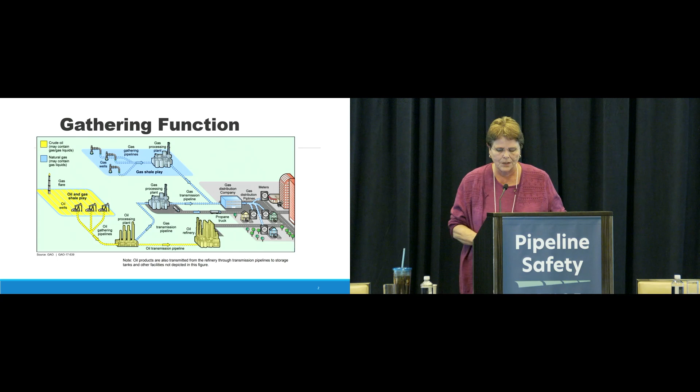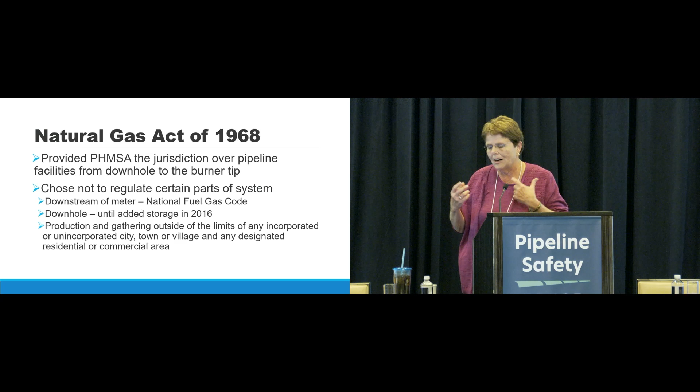So the Natural Gas Act of 1968 provided PHMSA with jurisdiction over pipeline facilities from downhole to the burner tip. PHMSA chose not to regulate certain portions of them. They chose not to regulate downstream of the meter - that was covered adequately by the National Fuel Gas Code. They chose not to regulate downhole until 2016, when they added storage fields and storage wells to their jurisdiction. And they chose not to regulate production outside the limits of any incorporated or unincorporated city, town, or village. So they really didn't even regulate gathering lines for a number of years.

So in 1992, Congress gave PHMSA the authority to regulate gas gathering, to define gas gathering, and to develop regulations for these regulated gas gathering lines. PHMSA worked on this for a number of years. API RP 80 was published in 2000 - this was the industry standard on where to determine the start of gathering, the end of production, and how to determine gathering lines.

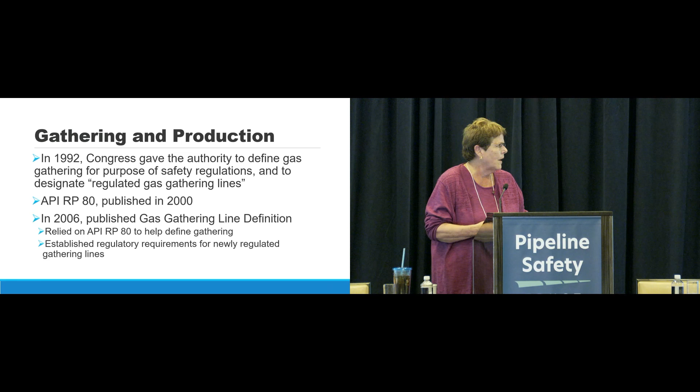So in 2006, PHMSA published the gas gathering line definition. It became regulations, relying on API RP 80 to define gas gathering and establish some regulatory requirements for the newly regulated gathering lines. One of the things was to establish the start and endpoints of gas gathering as defined in 192.8, as defined in code and in the standard.

It incorporated API RP 80 as an incorporated-by-reference standard, and it established regulated gathering by class location - so Class 2, 3, and 4 became regulated. Class 1, which was less than 10 buildings per mile, remained unregulated. So what PHMSA is doing is looking for those areas where there was a bigger impact on public safety to make those lines regulated. They also established the types of lines based on the materials and pressures those lines operated at.

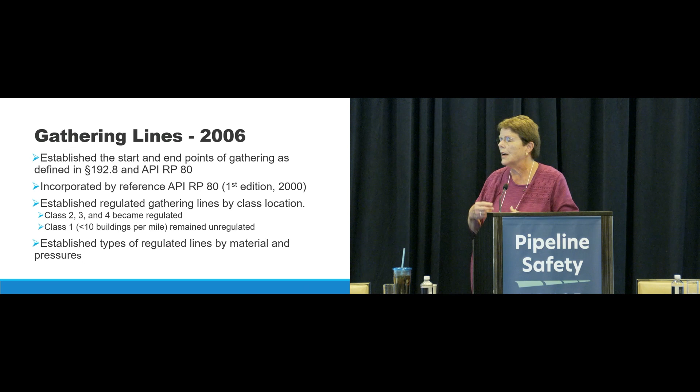So this is a very simplified picture of production and gathering. You can see production listed in those light black lines - those are the wells, the circles. Unfortunately there's no symbol in Word or PowerPoint to designate a well symbol, so I just used a circle. So the circles are wells, the black lines are flow or production lines, and the red is the gathering line. Now one of the problems is terminology.

What do you call it? What do you call production? What do you call flow lines? Industry calls it, folks, operators call it different things. So in the simple world, gathering starts where you have a commingling of two well lines. Up until that, it's production. Then it becomes gathering.

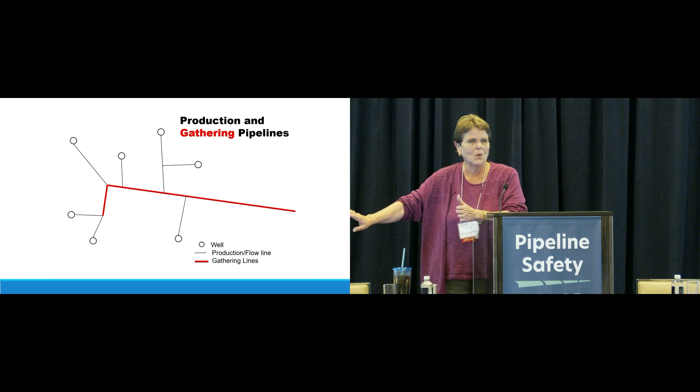Some states have defined gathering starting where it goes through the meter. The state of New York defines it as within 50 feet of the wellhead. Most states rely on API RP 80. I even have a problem within West Virginia where my oil and gas folks who monitor the wells call everything from the well to the meter gathering, and everything downstream of the meter production, which is the exact opposite of what I call it. So there really is no standard for what's called gathering and production.

Some unique characteristics of gathering lines is they have their highest pressure at the beginning of their life. They're attached to the wells, and when wells are first drilled, they're at their highest pressure. As the pressure declines from the well, the pressure in the pipelines declines. So as the lines age, the pressure reduces, and it's not as big an issue as transmission lines that carry the same pressure year-round.

Some of the other issues with gathering lines is most of them were constructed without any regulatory oversight. There are still wells in West Virginia over 100 years old that are economically viable and still producing. So that means that pipeline is 100 years old. I have seen pipelines built out of well casing. I have 5-inch lines, I have 1-inch lines, lines with dresser couplings, lines that are screwed together. They used whatever they could, okay?

I put this picture up here because they're built without regulatory oversight. That black line is actually a production line suspended in the air, okay? Yeah, those pictures that show them in the air, a lot of them come from West Virginia.

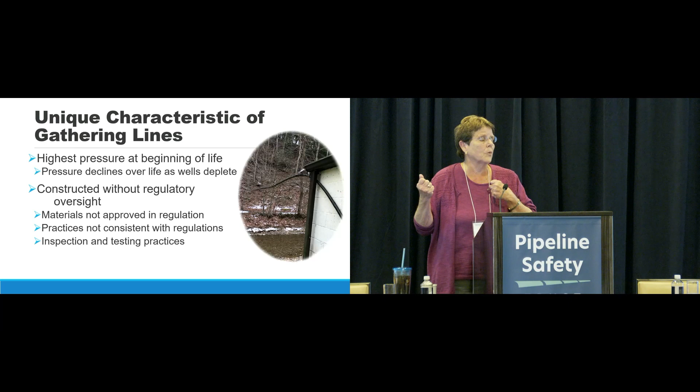So in 2006, they defined two types of gathering lines. There was type A, which are metallic lines operating at a hoop stress greater than or equal to 20% SMYS, or non-metallic lines, mostly plastic or composite materials, operated at MAOP greater than 125 pounds. These are located in class 2, 3, or 4 locations, and they were required to have full transmission regulatory requirements - they had to follow the same rules that transmission lines did.

Type B lines are metallic with an MAOP producing a hoop stress of less than 20% SMYS, or non-metallic lines operating below 125 pounds, in class 3 and 4 locations, or class 2 locations by one of 3 methods that PHMSA allowed operators to use. They had limited regulatory requirements. Now this kind of makes sense because there's lower pressure lines, and remember I said that as they age, the pressure goes down, so the requirements weren't quite as stringent.

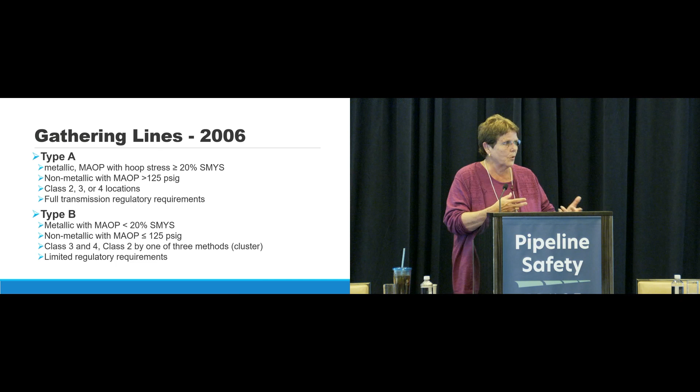But the problem was when the rule came out in 2006, conventional wells were the ones being drilled. There was no anticipation of the growth of the technology of horizontal wells. The shale plays such as Marcellus, Bakken, and Barnett were just starting to appear. So the regulations were not written for these new high pressure, large diameter gathering lines.

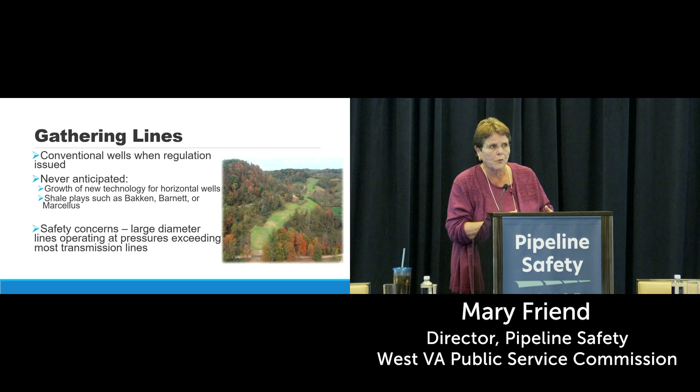These new gathering lines are operating at pressures that exceed most of the transmission lines. Typically these are built to about 1,440 pounds, while most transmission lines are operating at about 1,000. So the issue becomes, shouldn't those people living next to those gathering lines in those bottoms have the same safety aspects as somebody living next to a transmission line at lower pressure? And the gathering lines may not have been built to regulatory standards, so it becomes an issue.

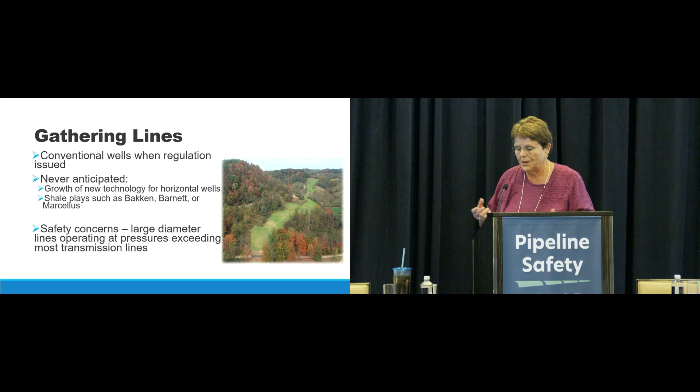Some of our challenges include the industry initiatives, API RP80, which tries to strip out a lot of the gathering. There's a term called incidental gathering, which was kind of an oversight by PHMSA in developing the rule. This allows lines coming out of a processing plant and taking that production gas to a transmission line - they didn't pull those into the regulations, so they defined this as incidental gathering. I'm okay with some incidental gathering, but there are operators claiming hundreds of miles of incidental gathering to get out of the regulatory requirements. So incidental gathering is an issue.

Back after the mega rule was issued, the notice of proposed rulemaking for the mega rule was issued, API RP 1182 was written. This was industry's attempt to get out of some of the regulatory requirements by writing their own standard. The problem with that is it was limited to pipelines greater than 12 inches. One problem with gathering lines is composite materials - things like fiber spar or flex steel. These are non-traditional materials, not accepted in code. Operators were afraid that if they became regulated, they'd no longer be able to use those materials, so composite materials were also a big issue. That's part of why 12-inch was used as a cutoff, because you can use coiled non-composite or composite materials up to 8-inch. Most of the lines above 12-inch were not composite.

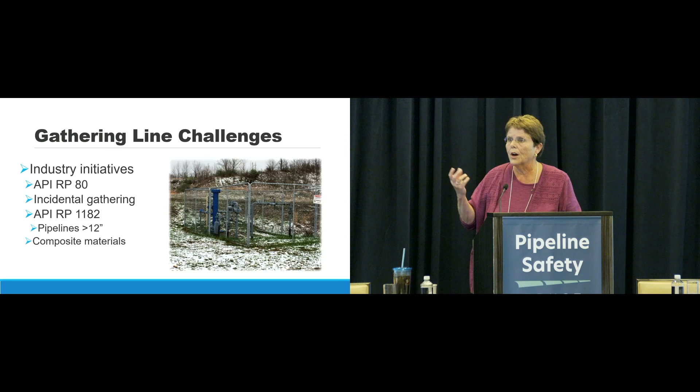So the gas gathering final rule was issued last year, just over a year ago. It subjects all gas gathering lines, including previously unregulated lines, to PHMSA annual and incident reporting requirements. PHMSA estimates this covers in excess of 425,000 miles of pipeline nationally. I actually wonder if that number's not a little low - I figure probably in the state of West Virginia alone I have between 70 and 125,000 miles of gathering lines. That's just one state, so I think that number's a little low.

The other thing they did in this gas gathering final rule is they limited this incidental gathering term to 10 miles, took away the ability to use it for more. So any operator in the future can only limit their incidental gathering to 10 miles and not use it for a long distance.

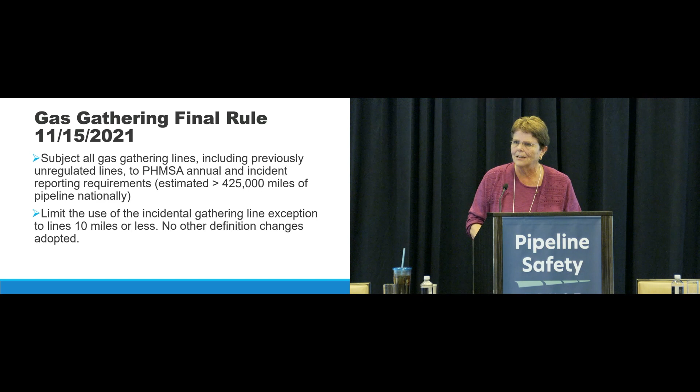On the previously unregulated gas gathering lines where the operating pressure exceeds 20% SMYS in Class 1 areas, they're now subject to certain safety standards. PHMSA estimates that 91,000 additional miles of pipeline will be subject to damage prevention and emergency planning requirements. Again, for public safety, 20,000 miles of additional pipe will be subjected to public awareness, line markers, corrosion control requirements, and leak survey requirements - which also require the repair of hazardous leaks. An additional 14,000 miles of pipe will be subject to MAOP requirements, meaning they have to test them and establish the MAOP of the line.

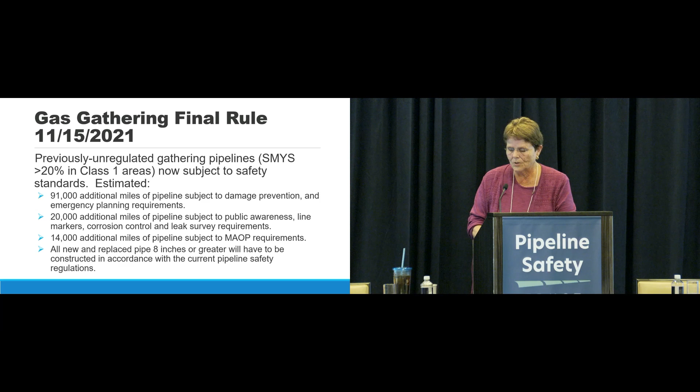It goes on to say that all new and replaced pipeline 8 inches or greater will have to be constructed in accordance with current pipeline safety regulations. So instead of being rogue and deciding to build it however they want, it's now subject to the regulations. It added 2 new categories of pipe, Type R and Type C.

The effective date of the rule was May 16th, 2022. All lines, including these Type R lines, are going to have incident reporting after this date. Their first annual reports will be due in March of 2023. Type C lines need to be identified by November 16th, 2022 - so sometime in the last 2 weeks they had to identify these lines. And they have to comply with safety standards by May 16th, 2023, although there is a limited stay of enforcement compliance that PHMSA has issued for some of the gathering lines.

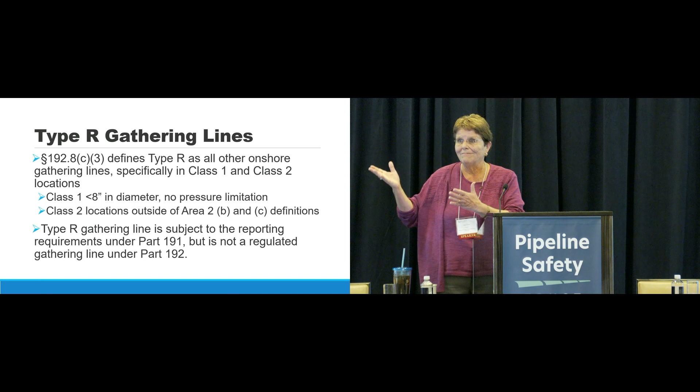So the 2 types of lines are Type R - I personally have never heard anybody say Type R for reporting, but it's reporting only. 192.8 says Type R lines are all other onshore gathering lines, specifically in Class 1 and 2 locations. It says Class 1 less than 8 inches in diameter, no pressure limitation. Now, I've been working with this rule for over a year, and looking over my notes this morning prior to this presentation, I realized that statement is wrong. Because Type C lines are defined as lines 8 inches or larger operating above 20% SMYS. So those lines larger than 8 inches but operating below 20% SMYS also become Type R lines. That's one of the problems with this regulation - every time I read it, I see another nuance, another question. So Type R lines are these Class 1 locations, anything that's not a Type A, B, or C, and then Class 2 locations outside of the definitions. Type R lines are subject to reporting requirements only.

They are not regulated gathering lines under Part 192. They only have to report their miles and incidents and provide an annual report.

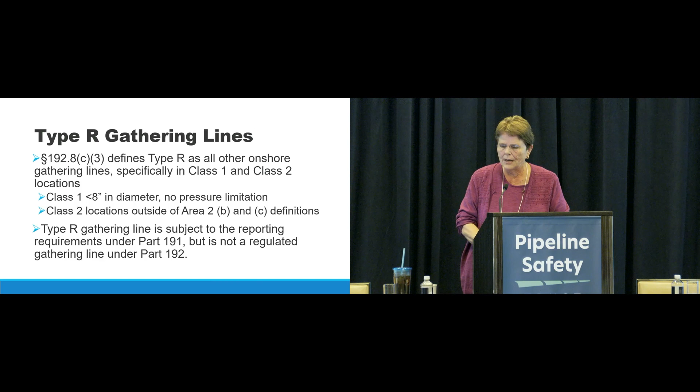So this is exactly what Type R lines do. They have to provide immediate notice of certain incidents. If I remember correctly, there have been about 6 incidents on unregulated, Type R lines since the rule went into effect. They have to do a written incident report, an annual report, and they also have to obtain an OPID, an operator identification number, for reporting purposes.

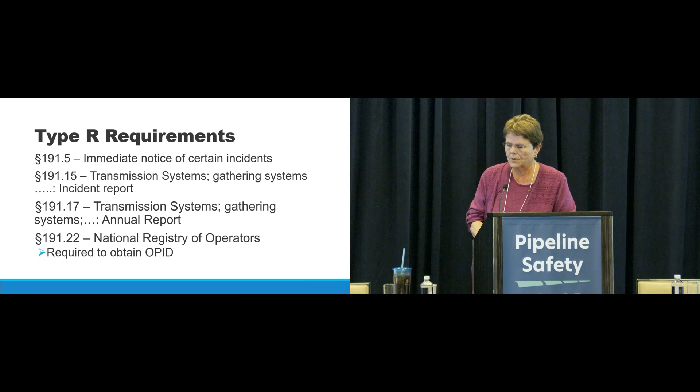So the other type of line PHMSA defined was a Type C line. It's an outside diameter greater than 8 inches, and any one of the following: if it's metallic with MAOP producing a hoop stress in excess of 20% SMYS, if the hoop stress is unknown, a metallic line with an MAOP greater than 125 pounds, or non-metallic pipe with greater than 125 pounds MAOP. And the non-metallic pipe could be plastic pipe or composite materials.

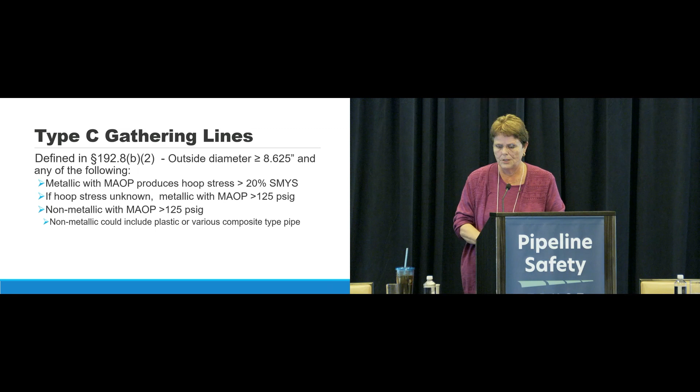Kind of a quick summary of what this requirement is. This is an additive requirement. So all lines over 8 inch are subject to reporting requirements. That means they have to do an annual report, incident reports. They're subject to damage prevention and emergency plans, and new or replaced pipe must meet the design and construction requirements that exist in code.

Diameters 8 to 12 inches with a PIR exception have to have what's in the first section, but they also have to have public awareness, line markers, corrosion control, and leakage surveys, and they should fix leaks as well. Then pipelines between 12 and 16 inches with a PIR exception, or all pipelines above 16 inches, need to meet the plastic pipe requirements, and they must establish a maximum allowable operating pressure.

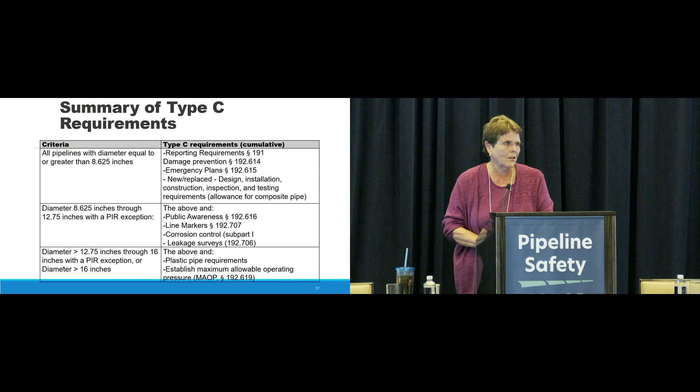I'm going to go through some of this stuff real quick. It needs to meet the reporting requirements of Part 191. It needs to have a damage prevention program, which means they need to participate in one-call, and make sure their lines are protected and not hit. They have to develop emergency plans as outlined in 192.615.

And to me, this is really important. How do they respond in an emergency? I've been listening all day to these emergencies and how emergency responders respond or don't respond, and what they understand about the lines. This is where it becomes important. They need to understand these are gathering lines, and they need to have an emergency plan on what they're going to do if the line fails. Prior to now, they never had to have an emergency plan.

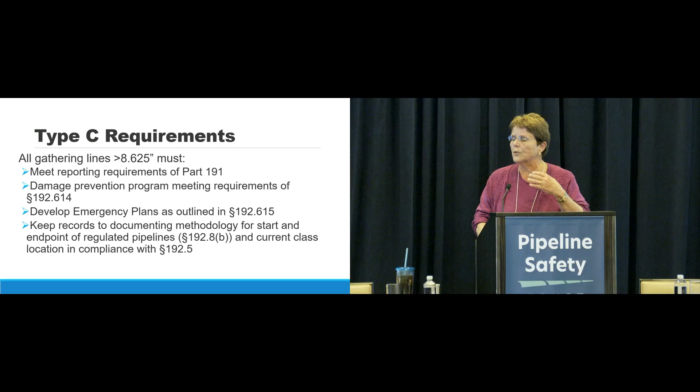They also have to keep records documenting the methodology they use to determine their start and stop locations. And this is not just for Type C lines, it's also for Type A and B lines.

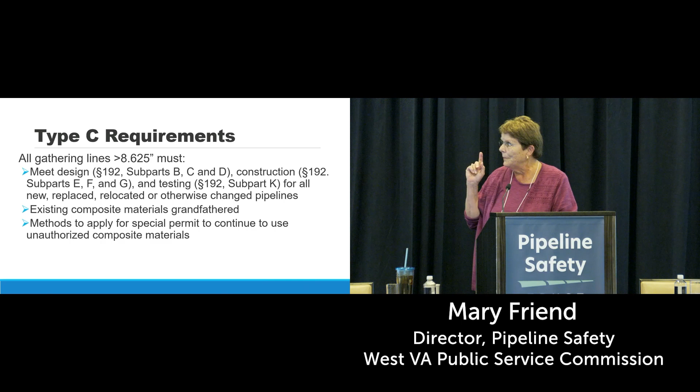They also have to meet all the design requirements. This is not the one I corrected because I have an error — it should be the testing requirements of subpart J, not subpart K. So I will acknowledge I made a mistake there. They have to meet those design, construction and testing requirements for all new, replaced, relocated, or otherwise changed pipelines. One note: existing composite materials are grandfathered, so pipelines built out of fiberspar or flexsteel can continue to operate. And code allowed for special permits for operators to install them again in the future — even though they're not authorized materials through code, operators can apply for a special permit to install those lines.

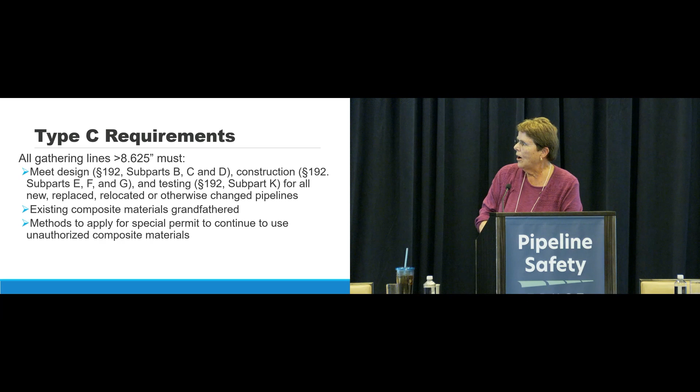All gathering lines greater than — excuse me, that's the one I just had. So if the pipeline is less than 16 inches in diameter, they also might apply for a PIR exception. This allows operators to parse the line according to population adjacent to the pipeline. Remember I told the story about that line going up and over the hill and coming across the bottom and going back up over the hill? Well, this method allows them to parse it, so the only place they have to meet some of those requirements is where the population is adjacent to the pipeline.

And that part of the line that goes up and over the hill doesn't need the same requirements because nobody lives along it. So the methods they can use to parse the line: method one, where there is no building for human occupancy within the PIR of the pipeline. The second one is the segment is not located in a class location that contains a building intended for human occupancy or other impacted site. So doing the numbers, a 24-inch pipeline operating at 1,440 pounds is kind of the split between whether I use method one or method two.

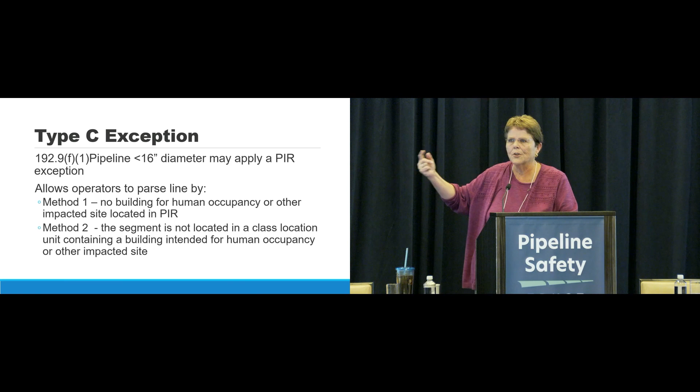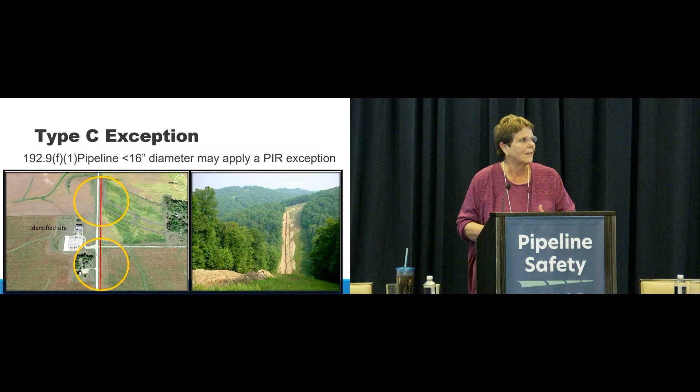This is the same as used in integrity management. On the other side, I simply use a class location unit, 660 feet on either side of the pipeline. So if I have a house within 660 feet, it qualifies or does not qualify for the PIR exemption.

Both of these methods use buildings suitable for human occupants, such as houses, office buildings, stores, restaurants, factories, outside recreation areas. They also use the term other impacted sites, which are small, well-defined areas occupied by 20 or more persons at least 5 days a week for 10 weeks out of the year.

Again, the same information is used in class location. This is things such as ball fields, picnic areas, rest areas.

And then they added this one, which is the definition for a moderate consequence area. It's any portion of a paved surface of a designated interstate, other freeway or expressway, or other principal arterial, with four or more lanes.

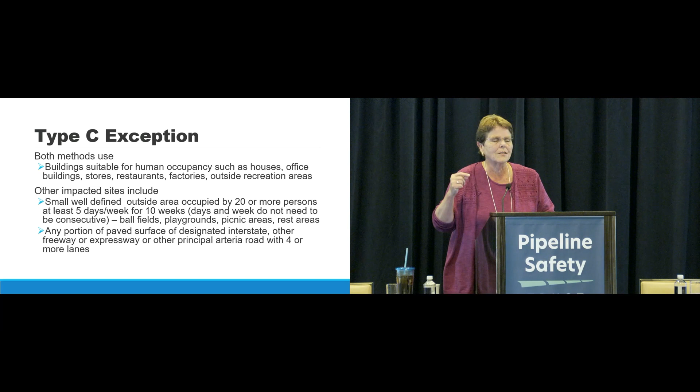The comment was made earlier about the event. Sissonville was an event in West Virginia that took out the interstate for about 12 hours because the event happened right next to the interstate. This definition was added because of that particular event.

So when we talk about pipelines now, we've talked about this PIR exemption. All pipelines with PIR exemption, and pipelines greater than 16 inches, must also have a public awareness plan according to 192.616. This is public awareness, not engagement. They have to install pipeline markers.

Now, I'll tell you one of the most frustrating things in my job is trying to figure out who owns a line, because gathering lines are not required to install pipeline markers. So I'll get somebody calling in saying, hey, I've got a leak, can you get somebody to come fix it? I have no idea who owns the line.

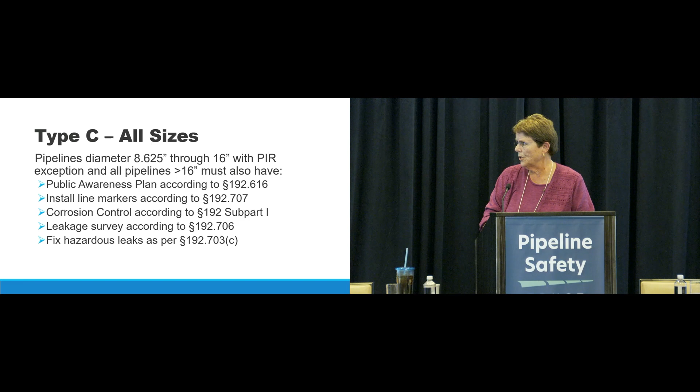They also have to do corrosion control. They have to do a leakage survey, and then they have to fix hazardous leaks.

Pipelines 12 to 16 inches with a PIR exception, or pipelines greater than 16 inches, must also establish a maximum allowable operating pressure.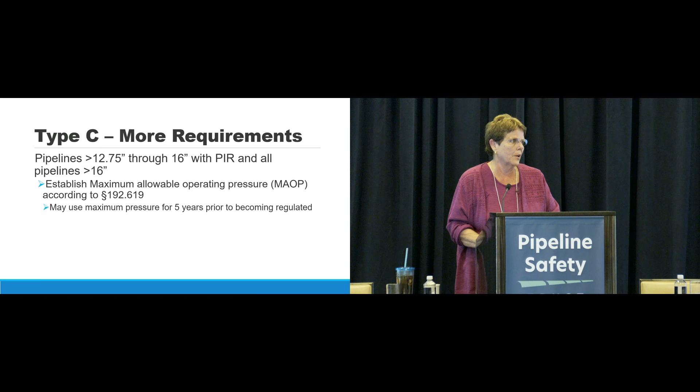So Type C lines are not required to have an O&M manual. We've heard discussion today when we talked about the Section 114 things, and these are the written procedures operators follow to perform maintenance activities on their pipelines.

Type C lines are not required to have an O&M manual. So one guy can do it one way, the next guy can come along and do it a different way. No standardization. They're also not required to have an OQ plan.

A lot of times the issue becomes, particularly with gathering line operators, sometimes they're looking at a fairly transient workforce. They may not be qualified. They've never been trained to do some of the maintenance activities.

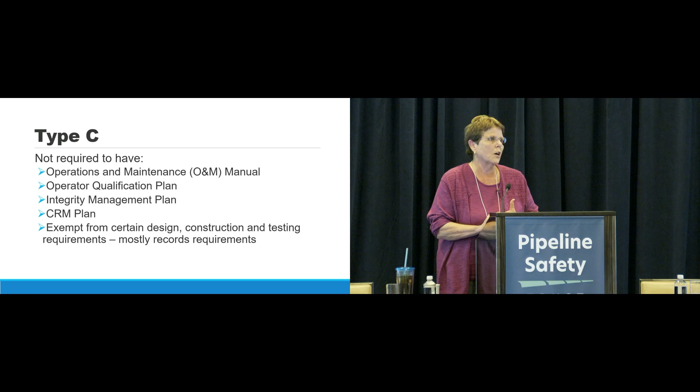They are not required to have an integrity management plan. They're not required to have a control room management plan. And they are exempt from certain construction and design requirements, mostly in terms of records and the type of records they have to keep.

Type C lines are subject to drug and alcohol requirements, because they are a regulated line under Part 192. They are subject to the Part 199 and Part 40 drug and alcohol requirements.

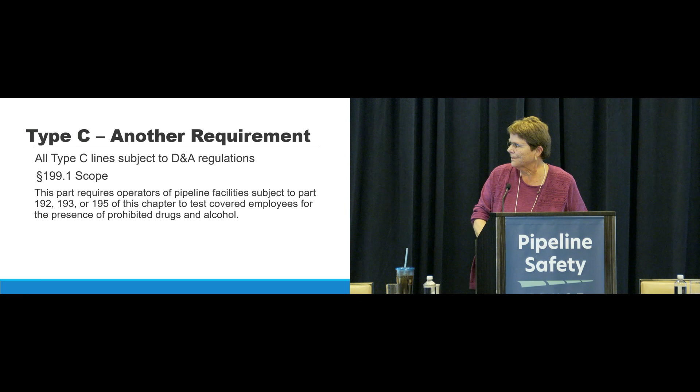So the question becomes, where does gathering start? Well, gathering actually doesn't start at that valve on the side of the wellhead. That's where the pipeline starts, but that's not necessarily where gathering starts.

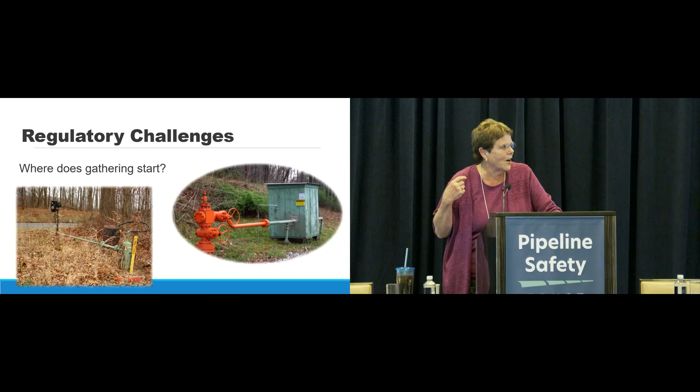And you can see these are almost two extremes. The one on the left is probably a low pressure production well at this point. The one on the right is a higher pressure line. You can tell just by looking at them that they're different.

So API RP80 is the standard for determining what is regulated and what is not. But one of the problems with API RP80 is it does not address how horizontal wells were drilled.

What we have is well pads with multiple horizontal legs from a single pad. So the production then is commingled in a header at the pad, and those lines coming out of those pads are often 8, 10, 12 inches in diameter.

At least in my opinion, that header is the start of gathering. I have not gone through that exercise with my oil and gas folks to see who makes that decision, but that's the interpretation. Other locations are subject to operator interpretation. We basically have to go with what the operator identifies. We don't have enough personnel to do the analyses to determine yes this is gathering, or no it's not.

We also have operators who are unfamiliar with API RP80. They don't even acknowledge they have gathering. Hey, what do you mean gathering? I have 3 well lines.

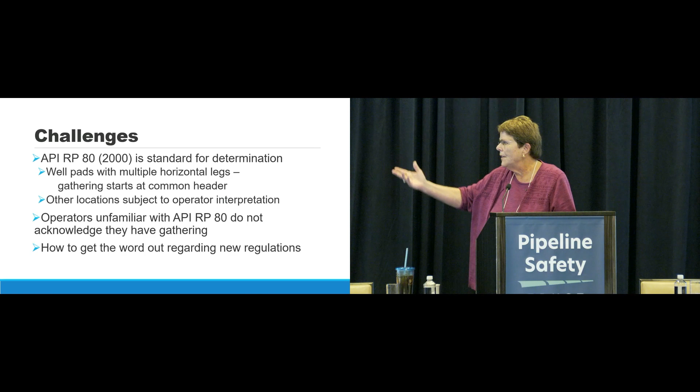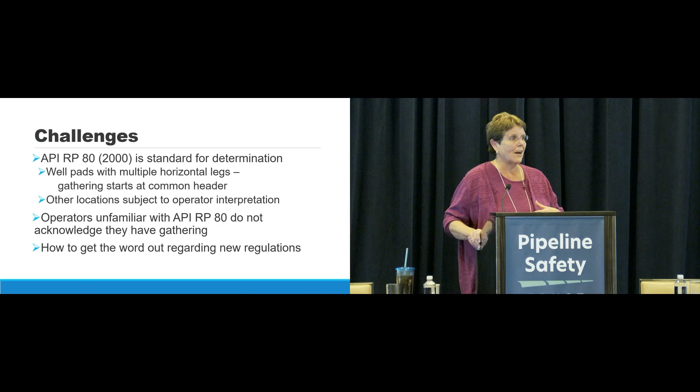Then how do we get the word out regarding new regulations? In the state of West Virginia, I sent out 1,200 letters to oil and gas well operators, providing them information on the new gathering line regulations, resources, and a method to get feedback to us or ask us questions - and not a single response. So I'm actually wondering whether or not the word has gotten out that these lines are now regulated or that they have to report it.

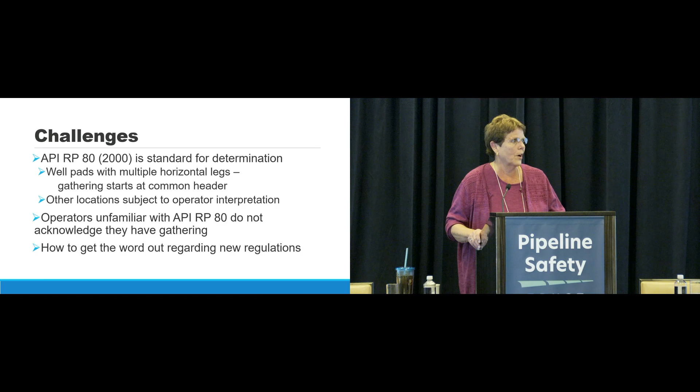The gathering line issues are unique to state programs. States are the ones who regulate this, not the federal government. They are intrastate pipelines. And one of the problems we have is name changes. I think Blaine talked about somebody with 2 different name changes, same op ID. How about I have assets that have changed names once a year for the last 8 years?

And there's not a pipeline marker to be found, not an emergency number to be found. They barely report it to us. So the name changes and trying to track these operators down is just tremendous.

We have a lot of forms that we need to be using because PHMSA doesn't inspect gathering lines, even though they regulate them. It's left to the states to determine how they're going to inspect and the forms they use. My favorite story is I developed a form for the Type B lines - my group and I developed this form, 2 pages, really simple.

So now in trying to implement these new Type C gathering line rules, PHMSA said, well, send me your form. So I sent them my form. They took my 2-page form and turned it into 59 pages. While I appreciate that, there's a lot of things on there that don't need to be, because the Type C lines are not required to follow the full transmission requirements. So we're still struggling with the forms.

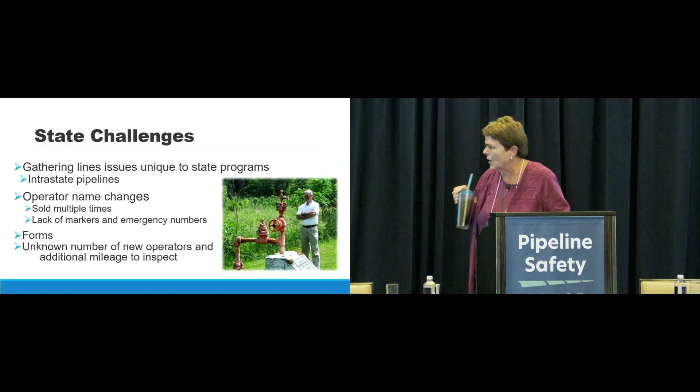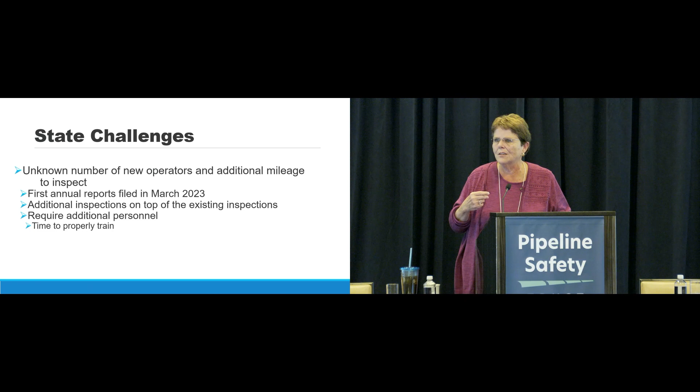Okay, so that's what I was going to say. One additional comment on this is when you get new inspectors, they cannot immediately start inspecting. You have to get them trained, and that's a 2 to 3 year process to get your inspectors trained.

So the reality is PHMSA didn't create 2 classifications, they created 4. I've got these Type R lines, Type C lines between 8 and 12 inches, Type C lines between 12 and 16 inches, and then pipelines greater than 16. They were categorized by size and pressure, but what's going to happen is operators are parsing their lines into multiple segments. So a single 60-mile pipeline segment may have 2 or 3 areas of Type C, then they may have a PIR exemption, and then they may go to a Type A.

Okay, what do I do? How do you inspect it? How do you piecemeal it? There's a lot of confusion regarding requirements, and I even admitted to you I'm still confused. I still see things I have not seen before.

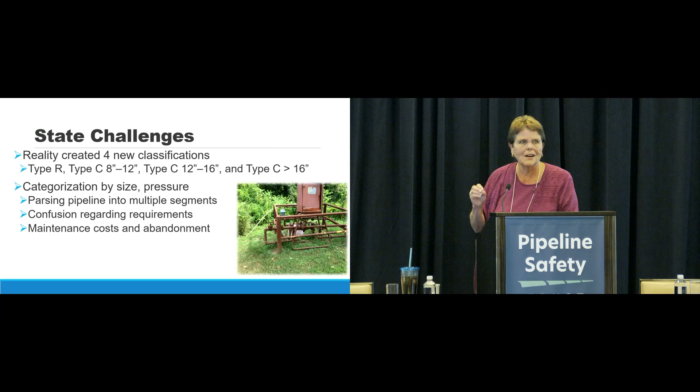And then there's the maintenance cost abandoned. The concern really is not the lower pressure lines. The concern is these higher pressure, larger diameter lines.

So some of the challenges we face with Type R lines is the location of the pipelines. A 100-year-old pipeline, do you know where it is? You can make a best guess. You probably don't know where it is.

100 years old, the age of the pipelines, the materials they use, their legacy construction issues. I threw this picture up, and please, this is not in the United States, this picture.

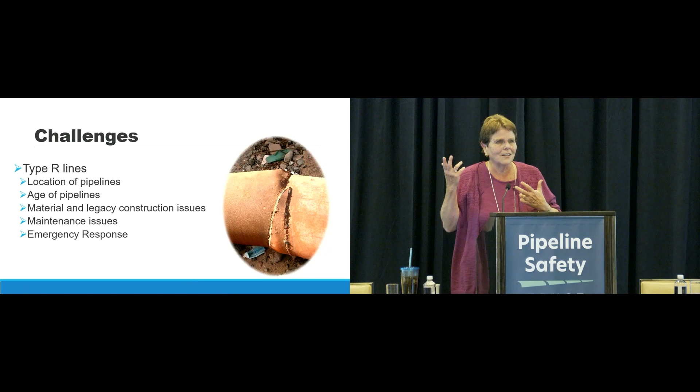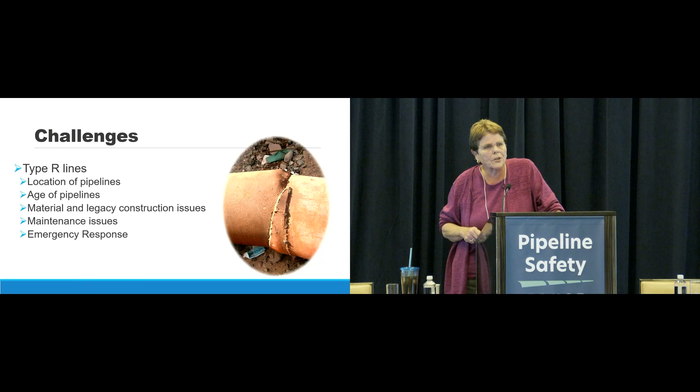But this is the kind of things you can find on some of these older areas. Maintenance issues and emergency response. Emergency response is huge. Type R lines don't need pipeline markers, so how do we get the stuff fixed?

We also have exposed pipe on these Type R lines, right-of-way issues, damage prevention. In the state of West Virginia, pipelines less than 3 inches do not need to belong to one call. And that's a state regulation, not a federal one.

And then lastly, leaks. We can't force the operators on the Type R lines to fix the leaks because there's no regulatory authority to do so. One of the biggest frustrations is getting those phone calls that say, I have a leak on my property, can you get it fixed? My response is, I will see what I can do. And if I can figure out the operator, I can usually give them a call or send them a note and attempt to get it fixed, but it doesn't work all the time.

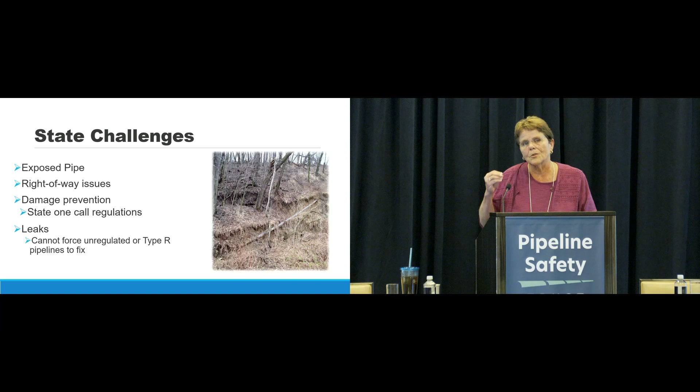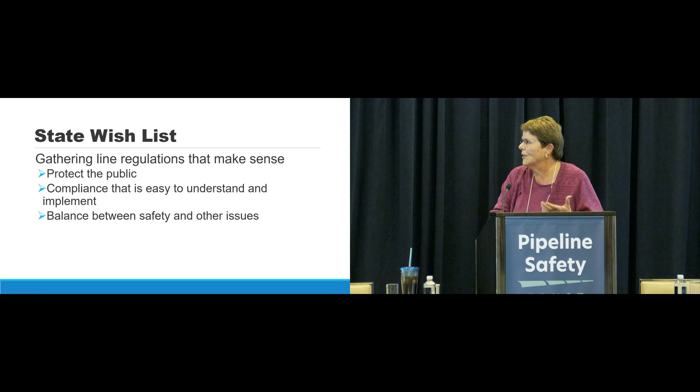And when we talk about emissions, it's some of these unregulated lines that are the biggest issue. So what we need are gathering line regulations that make sense, that protect the public, that compliance is easy to implement and understand. Like I say, I struggle with this. And then we need a balance between safety and other issues. So with that, I'll leave you my contact information and see if there are any questions.

Oh, Christy, you can't ask one. So I'm going to play—thank you, Mary, for your presentation.

I'm going to play devil's advocate for a second. I guess I'm curious as to how PHMSA has issued these new regulations for gathering lines without the valuable input that NAPSR members or states would provide, or is some of the things you're sharing now a result of learning more beyond those initial discussions with the regulations?

It's a combination, but the biggest issue, and I think Max talked about it a couple times this morning, is the ex parte rule. And I think John talked about it too, that we're treated as a member of the public. So once it goes into a rulemaking process, we are not allowed input into the regulations. And I think a lot of the problems could be solved that way. I do know that this rule was negotiated more than some other rules were, with a lot of pushback by industry.

Mary, Glenn Archambault, Jackson County. So does any of this get buried by requirements of any kind? And does local government require any kind of a permit to excavate or grade or anything of that nature, in terms of building lines?